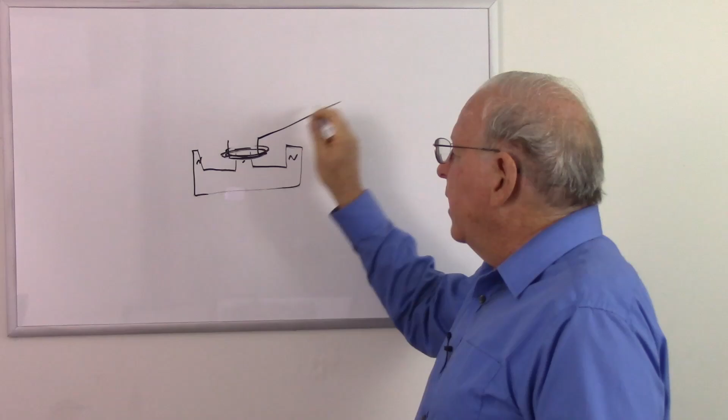A dynamic microphone is optimized to pick up sound and convert that into an oscillating current, and a speaker is optimized to take an oscillating current and convert that into motion.

So our speaker, let's take a look at the parts of it. As we said, there's a magnet. Usually that's a big ceramic magnet, and that's going to be mounted on some steel or soft iron. Soft iron meaning that it doesn't retain its magnetism when the magnet is pulled away. That's more permeable and carries magnetic fields a little better. And that soft iron is going to have that E shape that I'm talking about.

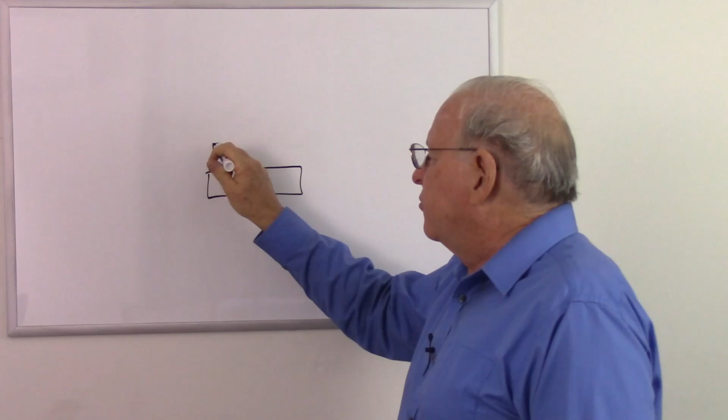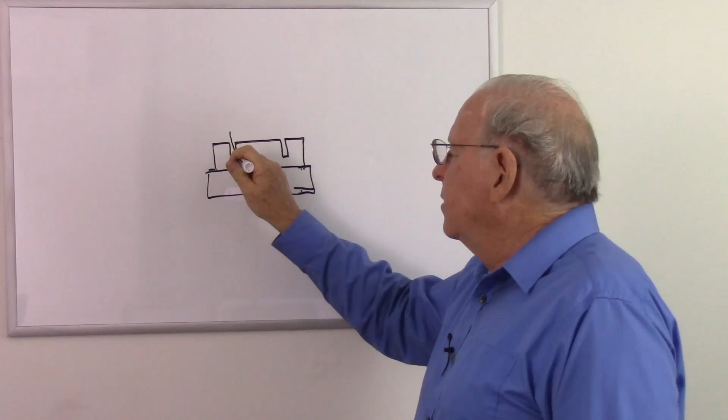And I'm going to draw this a little more realistically here, because the little channels in that E shape are very narrow, and inside there is a cylinder made of whatever material. It might be lacquered paper or it might be plastic, but that of course is wrapped with a coil, and that is free to move there.

And so as we run current to the wires coming out of that coil, we're going to get a current going in one direction as we put in alternating current. So here is our alternating current going in. Current goes one way, then it goes the other way, back and forth and back and forth.

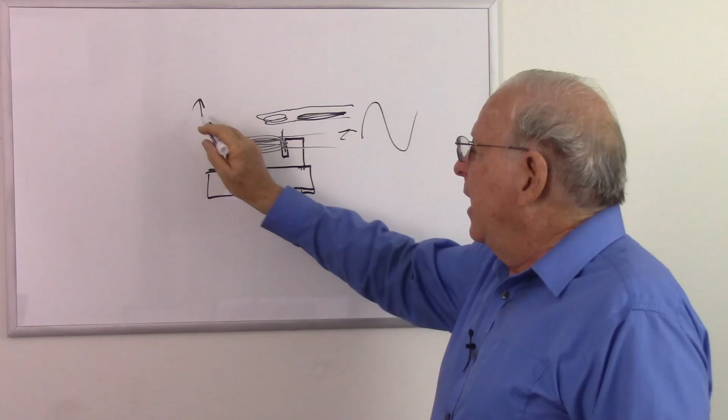As it goes in, we get a magnetic field which interacts with the magnet that the voice coil is suspended in, and that's going to cause that voice coil to want to go one way when the current is going one direction, and that voice coil is going to want to go the other way when the current is going in the opposite direction. So we will get an oscillation of that voice coil.

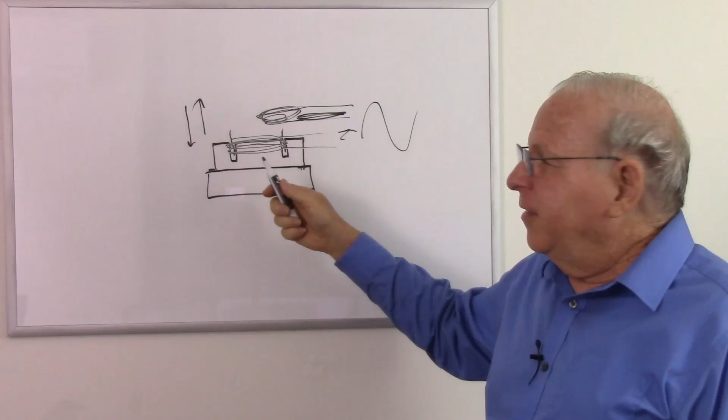Now, of course, there's a lot more to it, because if I simply had this, the first current that went in there would probably shoot the coil right out of there. But of course, there's other parts of the speaker that we need to make that work.

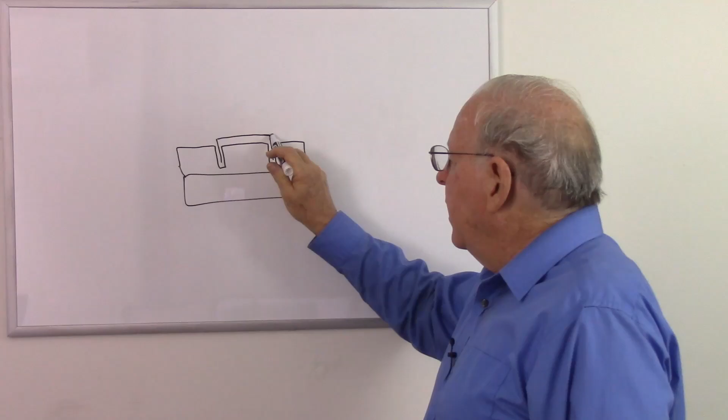So let's redraw that real quickly just to simplify that. So here is our magnet, or our pole piece connected to the magnet, and our voice coil is in there. I'm just going to draw it as two little lines there. That voice coil is connected to a cone of paper. Might be called the cone, might be called the diaphragm, but either way it's usually made of paper, a stiff paper. And also we have a frame around this, so this whole apparatus is mounted on a frame.

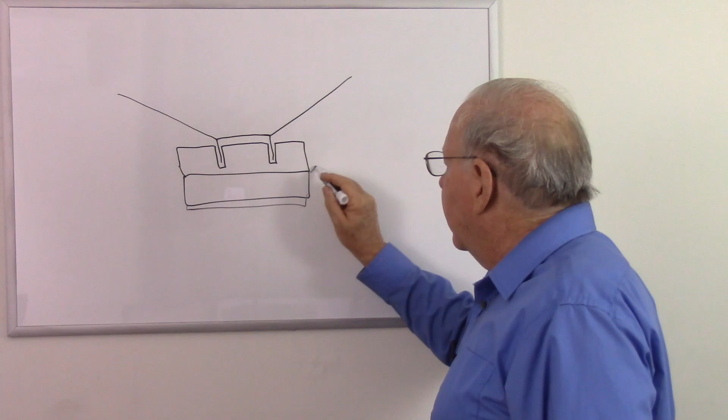Let's put that frame right here. This is usually a metal frame. And going to that metal frame, we have two supports. One is going to be in here, and that might go to some support at that point there. Notice I'm corrugating it because this particular support needs to be flexible, so it wants to hold that cone and that voice coil in the right orientation, but it needs to be able to move.

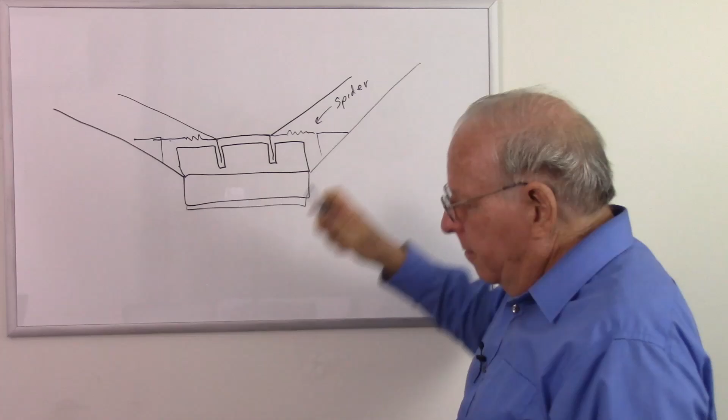This is called the spider. So that's going to hold the voice coil close to the magnet, but as we get further from the magnet, we have another support.

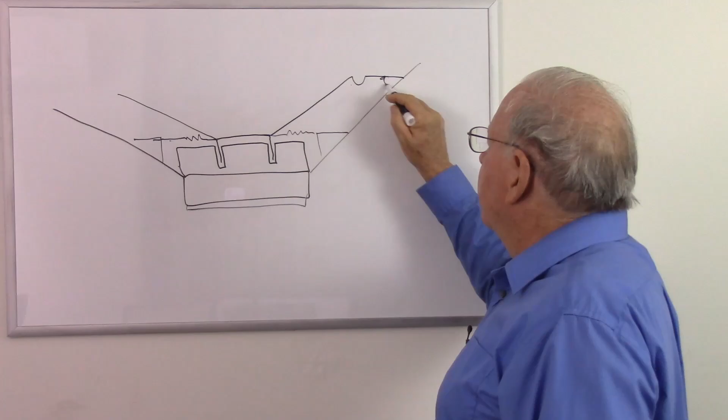I'll draw that as a little U shape here, connected to the frame. Once again, this might have a number of corrugations, trying to keep it symmetrical. This part is flexible, and that's flexible too. The cone is fairly inflexible. The spider is flexible. This is called the surround, or sometimes the roll, but usually called the surround, and it's simply a flexible support.

So now we have most of our speaker here. We have the flexible support at the edge of the diaphragm or cone. We have the voice coil, which is suspended by the spider. The diaphragm or cone goes between those, suspended inside the magnetic field.

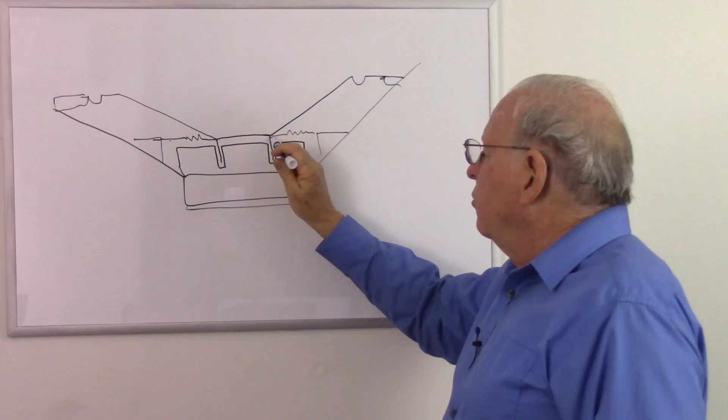This has a wire coiled around it. Those coils usually come out and connect to the cone, where there's a wire soldered to that. On the outside, I'll just draw this as a little line, but that goes to a metal connector that we can solder other wires to. There's actually two of those, but I'm just showing one. That's how we make the connection to the voice coil.

These are very flexible. This wire here is usually a braided wire, so I'll draw it like that - a braided wire that goes there, two of them of course, and that carries current to the voice coil. So that's the complete basic speaker.

What happens is if we put current to it, the current going one direction pushes the speaker out, and current going the other direction pulls the speaker in. With alternating current, it goes out and in at the frequency of the alternating current coming in.

We usually think of alternating current as 60 hertz or 50 hertz coming from the wall, the mains, or power grid, whatever you call it in your country. But alternating current can be any frequency, and the sounds we create when they go into a microphone create alternating currents from a human voice ranging from about 100 cycles per second to maybe 3,000 cycles per second. Our ears can hear from 20 cycles per second up to 20,000 cycles per second, or 20 hertz to 20 kilohertz.

So the speaker is going to be sensitive to a range of those frequencies. I'm drawing a big speaker here, which would be a woofer, sensitive to lower frequencies. A smaller speaker would be sensitive to higher frequencies. There might be some differences in the construction.

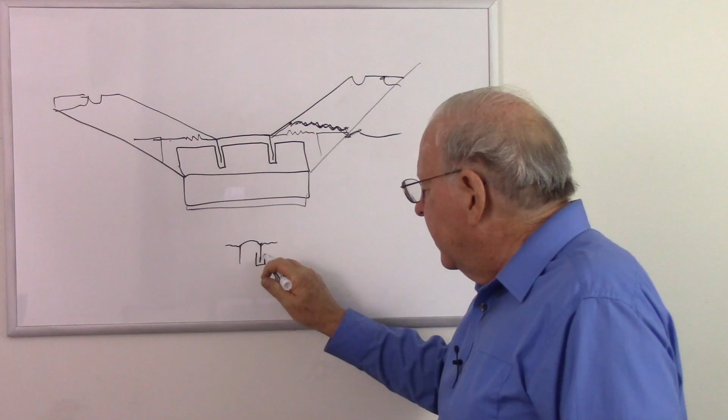For example, a speaker sensitive to high frequencies, called a tweeter, might have our voice coil, with a little dome on it and a spider. And of course here's our magnet. But notice what's missing is the cone - I'm taking that off again because your tweeter may or may not have a cone. It may have a small cone or no cone at all, depending on the design.

A tweeter needs to move very fast to respond to frequencies up to 20 kilohertz, whereas a woofer needs to be large and move a lot of air, but it doesn't need to be small because it doesn't need to move as quickly - lower frequencies won't be moving as fast as the tweeter.

A complete speaker system could have a woofer and a tweeter, and maybe even something in the middle called a mid-range speaker that handles the mid-frequencies. Now, some speakers try to handle a wider range.

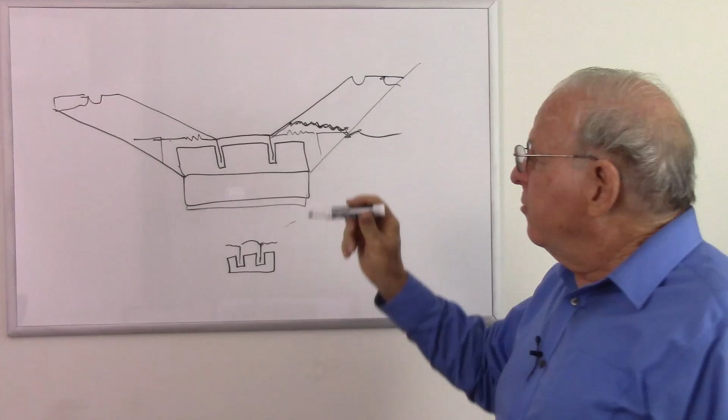One thing we can do is put a bit of a support right there and have an inner cone that's smaller, with some kind of flexible support in the right place. That is called a whizzer, and it reacts to high frequencies. So we have the main cone that reacts to low frequencies, and the whizzer, although it's moving with the main cone, can also react to the higher frequencies, broadening the range of the speaker.

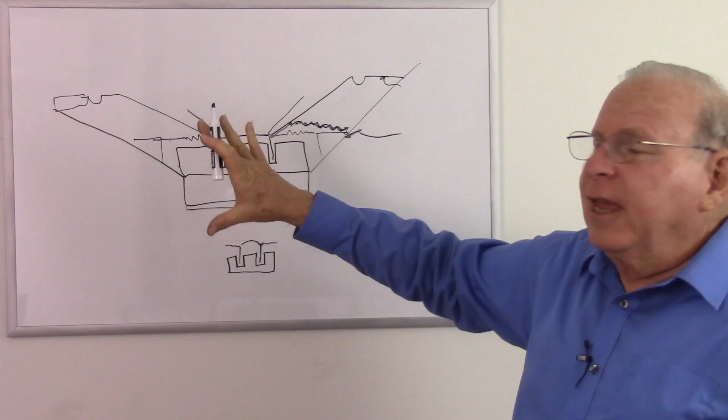You could have a full range speaker that responds to the entire range of human hearing, although it's not going to be as efficient as using multiple speakers, which I'll get into in more detail a little bit later.

So we added the whizzer cone to our diaphragm cone to the speaker to make it a wider range speaker, or maybe a full range speaker. And one other thing you'll find here that's kind of obvious but does have a name: it's usually curved like a dome, and that's called the dust cap. The speaker will certainly work without it since it has all the support, but you don't want dust getting in there. So there's a dust cap in the middle, and it does move some air, so it has some purpose.

And this tweeter, of course, seems to have a dust cap, but no main cone or main diaphragm such as the bigger speaker here.

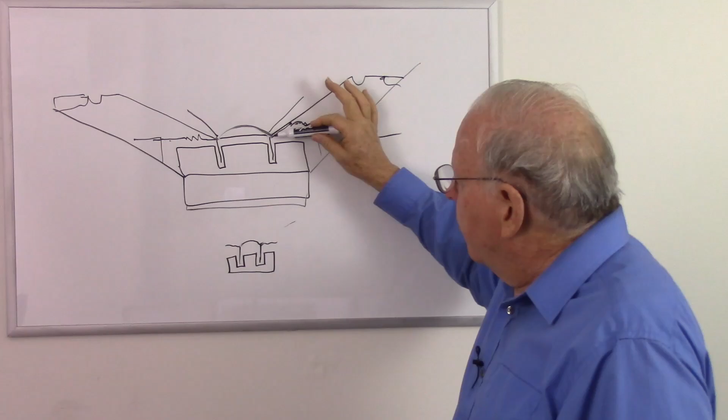So as far as the construction of a speaker, I've pretty much covered that. So there we have it: a magnet, a coil inside the magnetic field, and that's connected to a diaphragm, also called the cone. The spider supports the cone near the magnet. The surround supports the cone near the edge. Those need to be flexible so the cone can move freely. We have a dust cap in the middle. We may have a whizzer cone, but that just depends on the design if they want to try to increase the range of that speaker.

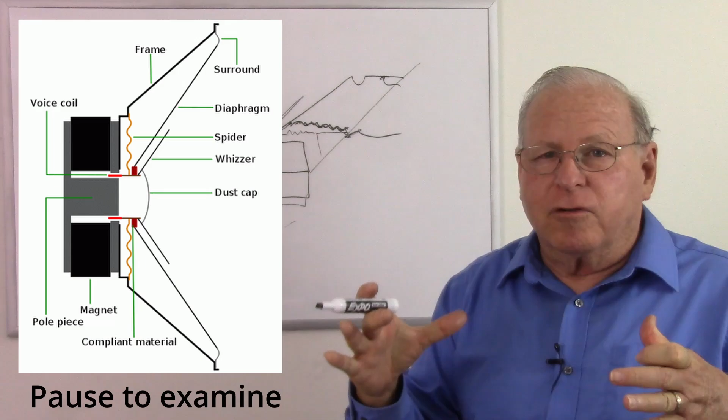And then, of course, a mid-range speaker would be smaller and made to respond to mid-range frequencies, and then the tweeter. This is called a woofer, the big speaker. A speaker that responds to some higher frequencies, but not all the way up to the highest frequencies, would be a mid-range speaker. And then the one that responds to the highest range frequencies is going to be a tweeter.

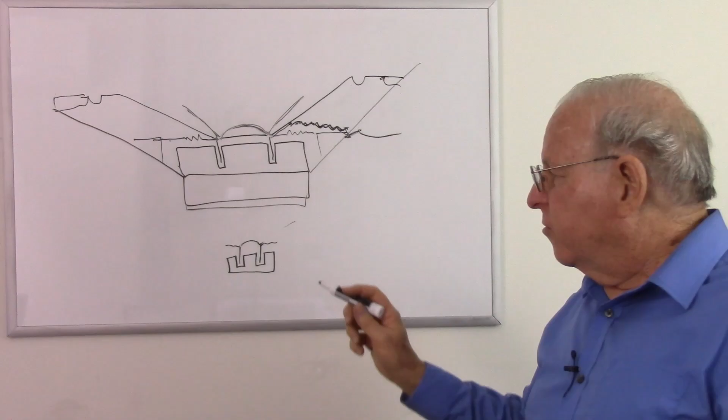And there can be some other designs for a tweeter. We'll talk about those in a moment.

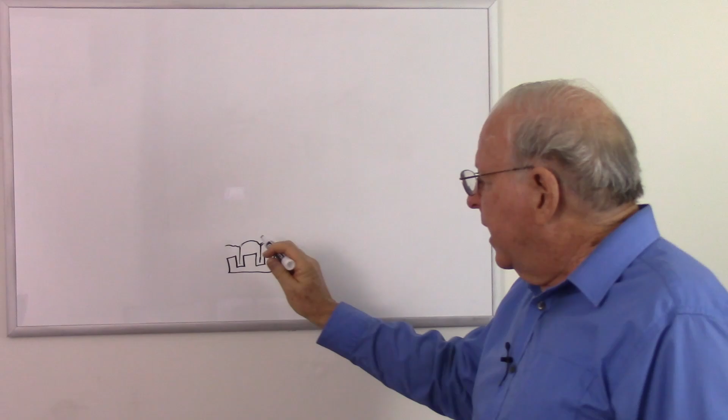Now, another type of speaker that's fairly common is a horn speaker. We can probably make one of those by getting rid of our big woofer here and just going to our little tweeter, because a horn speaker is going to have a driver, which is the part of the speaker that moves. So we don't talk about a driver in woofers and tweeters and mid-ranges unless they are a horn speaker. We may call it a driver, and the part that is the driver is pretty much a regular dynamic speaker. But this is connected to a horn which flares out.

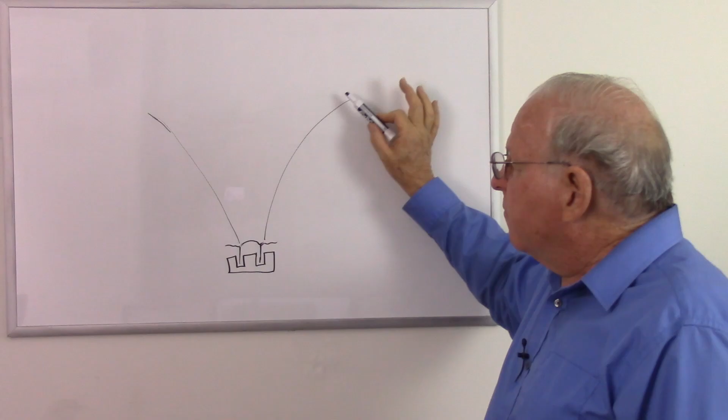And the purpose of that is that this horn couples the speaker to the air very efficiently. It's an impedance match, actually, like I'll be talking about in a moment - it's matching the speaker impedance to the air impedance. So it's a very efficient way to get the movement of this driver coupled to the air. Instead of having the big cone to couple, we have this horn that couples it to the air, and they can be big and they can be small.

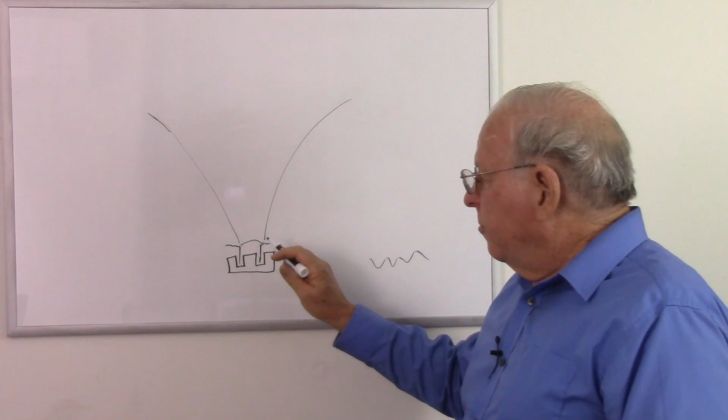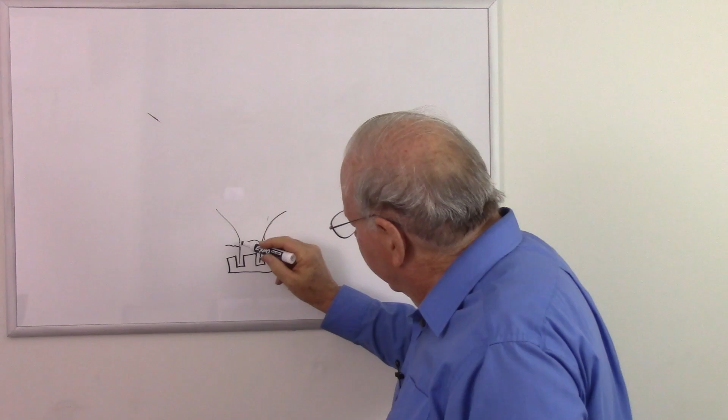They can work with lower frequencies or high frequencies, and a lot of tweeters might actually be horn tweeters. They would be, of course, a lot smaller, made to react to higher frequencies. I'll just draw that like that. So that's not connected directly to the speakers, but it's acoustically coupled, and it takes that sound and couples it very efficiently to the air.

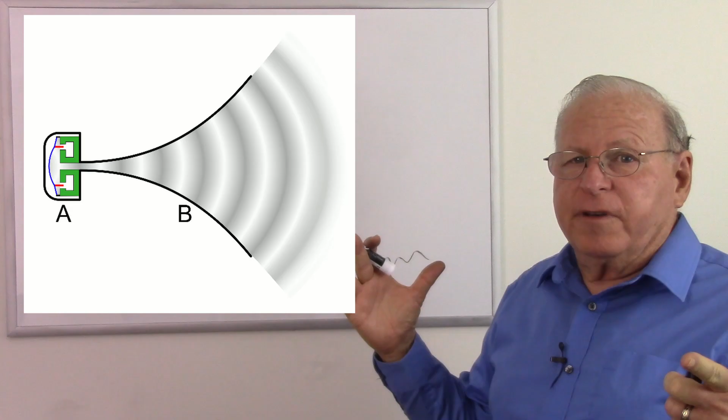So horn speakers are quite common. You go to a music venue or other kind of place where there's big speakers - horn speakers are ubiquitous because of their great efficiency that can get a lot of power into a lot of air.

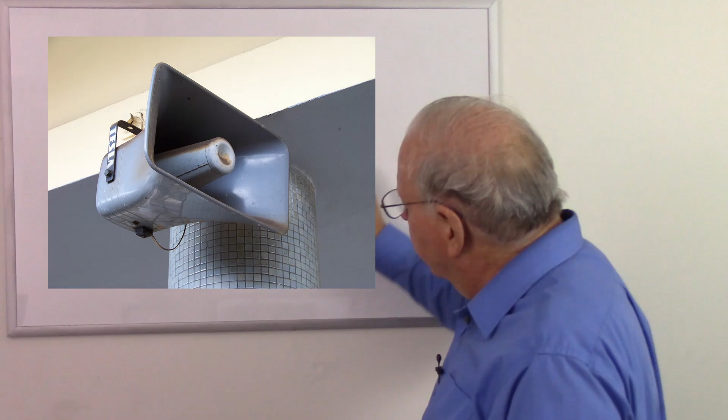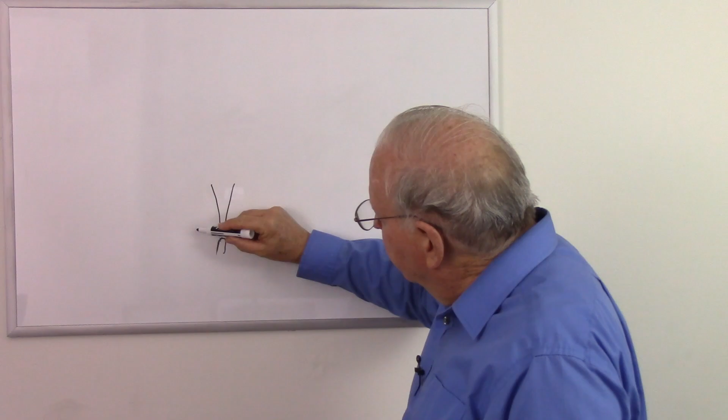Another type of horn speaker you might see is a folded horn - that's the megaphone. One common way to see that is with a handheld megaphone. Here's a picture of one here. And sometimes they're not handheld - there's one there. The way that is made is it's basically just another horn speaker, but I'm going to draw the profile of that here. So remember, this is the coil and driver, and we have the horn acoustically coupled to that. We go out just a little bit there, and then there's another horn capped over that. Let's see if I can draw that here.

And then on the outside of that is an even bigger horn. Okay, let's see how well I can do this. How's that look? Not too bad.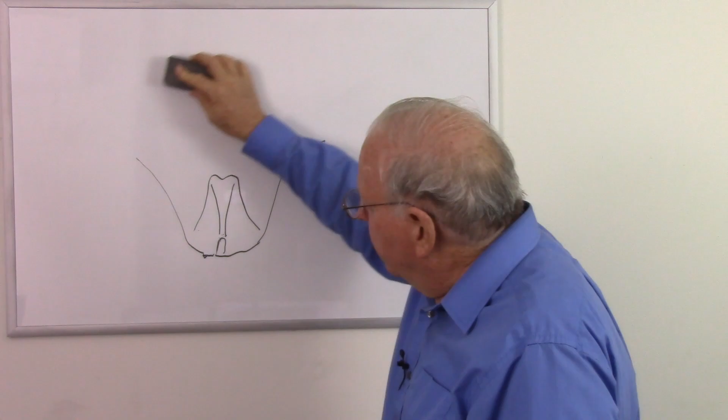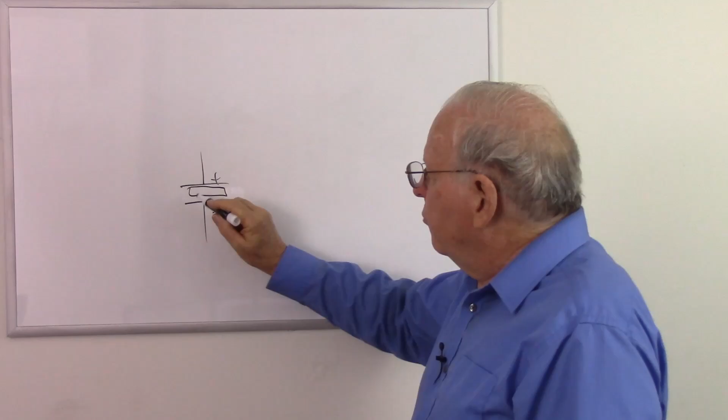One other speaker to talk about, besides the dynamic speaker, that's fairly common is a piezoelectric speaker. Remember, the piezoelectric effect is where if we distort a crystal, it's going to create a voltage, or vice versa. If we put voltage across a crystal, it's going to distort. So here's the basic diagram of that. There's a crystal between two holders. We put a voltage across there. It's going to distort that crystal, or if we distort the crystal, it's going to create a voltage.

So a piezoelectric element can act as a microphone or a speaker. Are there piezoelectric microphones? I don't know how common they are, but there are common piezoelectric speakers that are reasonably often used as a microphone. For example, if you buy an electronics kit that allows you to make all kinds of different circuits, you may find that it comes with a piezoelectric earphone, and if you make a circuit that needs a microphone, it might have you use that earphone as a microphone. Some of the Radio Shack kits came with a piezoelectric earphone that was also used as a microphone occasionally.

But we're going to use this as a speaker, and usually it's used for such as earphones or headphones. How often are they used for a big speaker? Not very often, but if they are, they would be used for tweeters because they work only at high frequencies. But that's worth mentioning because that is a type of speaker that you will see occasionally. I think they're sometimes used on the motherboards of computers, but don't quote me on that.

So that's your basic types of speakers, your dynamic speakers, and there's not much more to say about that. There is quite a science into building them, but that's not what this is about. We're just talking about the basics here. So let's move on to the next thing, and that is speaker enclosures, because to get the most out of your speaker, you have to have it in a proper enclosure.

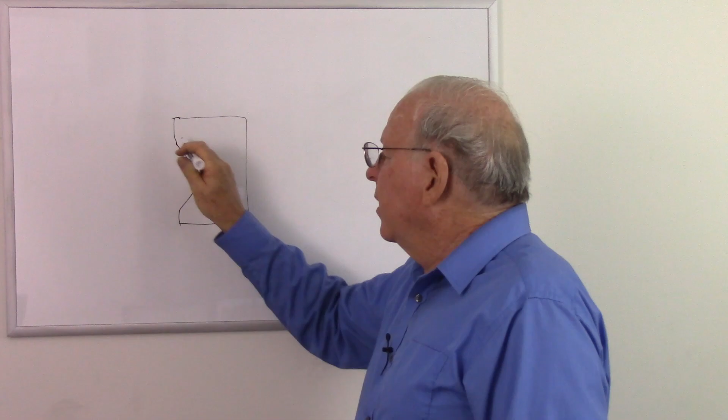So let's talk about the first type, and that would be a simple sealed enclosure. So we have a box and a speaker. And wires would come out, everything would be sealed, and the idea is that we don't want any air going into or out of this box. And the speaker may be designed for that. In fact, it's a type of speaker called acoustic suspension, which is specifically designed to work in a sealed box.

You do want to have the box the right size because the sealing of the box limits the movement of the speaker because, of course, as the speaker moves in, it's going to compress the air, and the air is going to resist that, so it's going to resist the movement. And when it moves out, it's going to rarefy the air, and the air is going to resist that also. So it restricts the movement of the speaker, which is negative feedback.

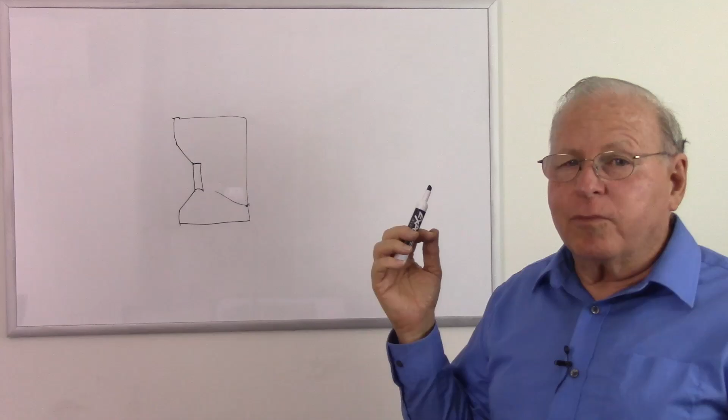And when we talked about that in circuits, what does negative feedback do? Well, one thing it does is it broadens the frequency range, the bandwidth of the circuit. So a speaker that has a response like this—here's our graph, here's 20 hertz and 20 kilohertz—a speaker may have a response that looks something like this. And if it's an acoustic suspension speaker in a proper box, it's going to essentially pull down that response in the middle and flatten it out. As you can see, that is therefore widening the frequency response. So it's pretty much flat from there to there, where before it was flat from maybe there to there.

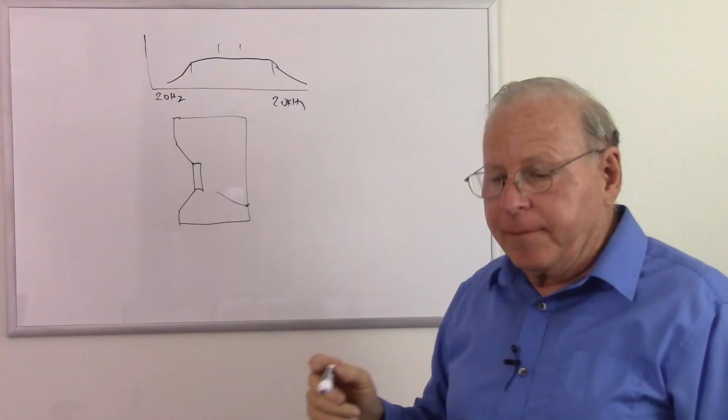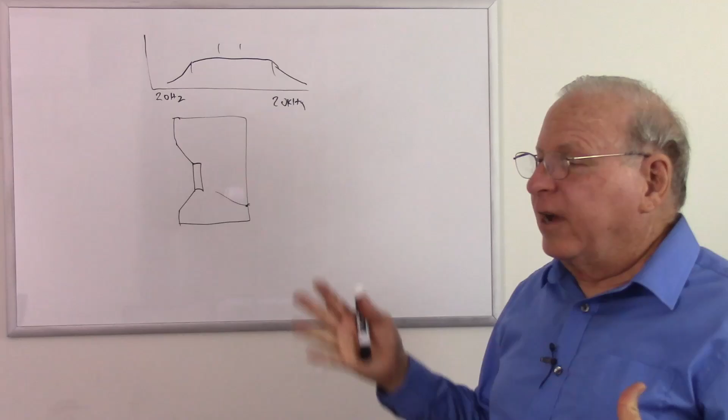So that's your acoustic suspension speaker. How common are they now? I don't know, I haven't bought speakers in a while, but the last time I bought a set of speakers and built them myself, I used acoustic suspension speakers.

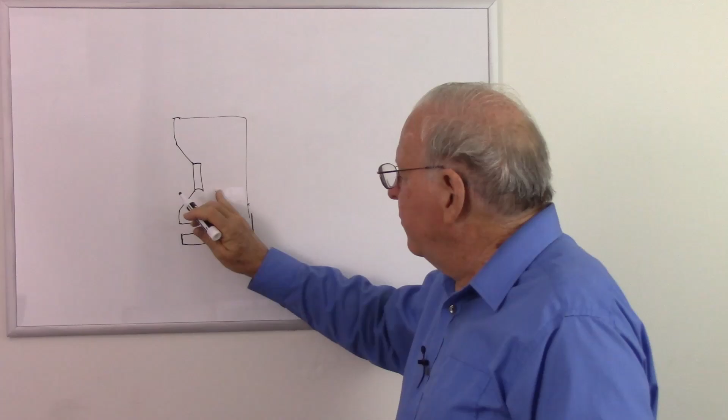Next type of speaker enclosure is probably the most common. You'll very often see these in your subwoofers if you have a system that has a subwoofer, and that is a bass reflex. I'm just going to modify this box here to become a bass reflex. So there's our speaker with its accompanying wires, and there's a tube.

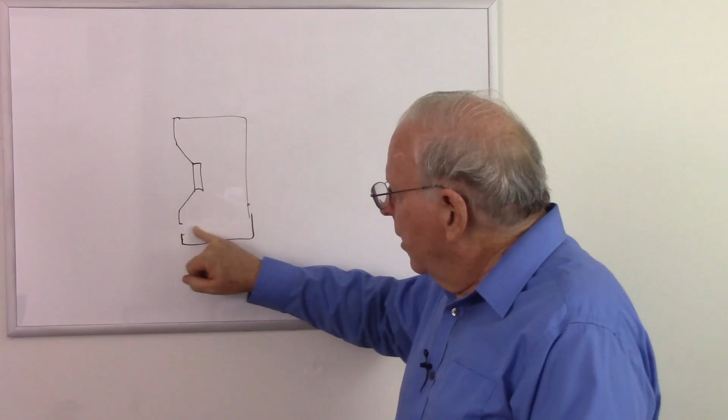So what's that for? Well, as I said with the acoustic suspension speaker, the speaker is going to lose some efficiency, trading that off for bandwidth. If we put a hole in here, that's going to do two things. One, it's going to allow that speaker to move more freely, so it's going to be more efficient. But one problem with that is that sound coming off the speaker is going to be out of phase.

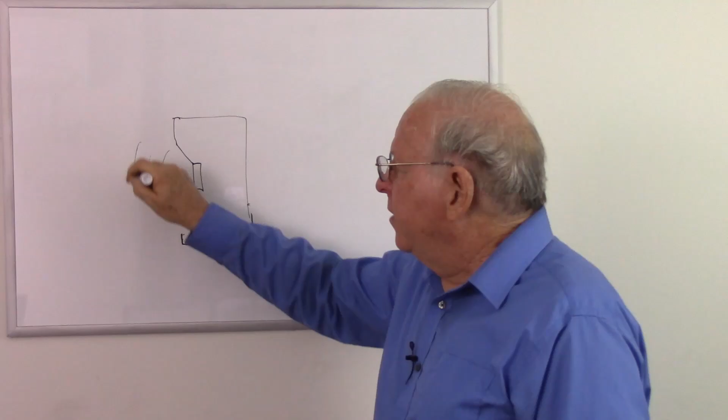When the speaker cone is moving this way, it's going to be sucking air in, and when it's moving this way, it's pushing air out. So when the speaker is making a wave that goes this way, we have a wave coming out of the cone that is the opposite polarity. So if we have a sound peak...

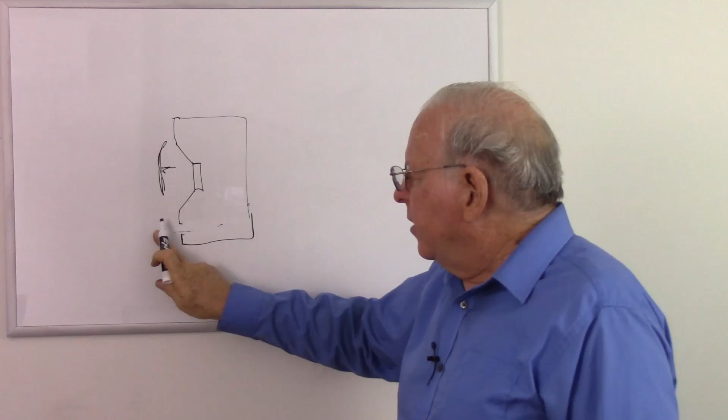Let's say the speaker is moving that way, creating a compression wave right here. At that point, there's going to be a rarefication wave produced here. They're going the same direction at the same speed, and they tend to cancel each other out. However, if we put a tube there with the right design, we have to have the tube and the cabinet designed the right way.

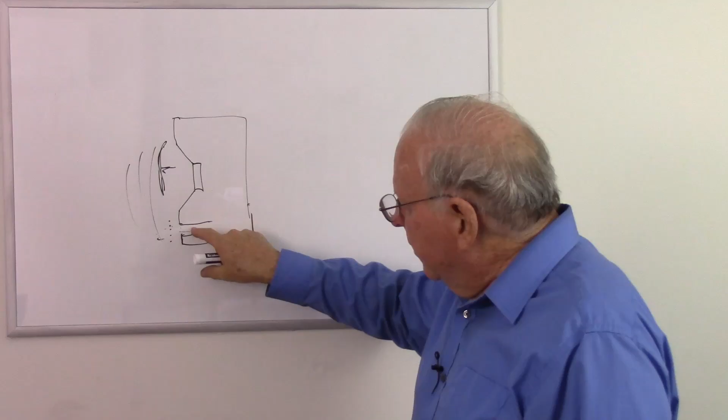Back when this was invented, it took a lot of trial and error to get this right. Now we can use computers to design them, but you had to get it just right: the volume of the cabinet, the length of the tube, and the diameter of the tube. And the tube and the cabinet together would resonate at frequencies above and below the range of human hearing, so you wouldn't get any peaking from resonance, but yet at the same time it's going to invert the wave coming out.

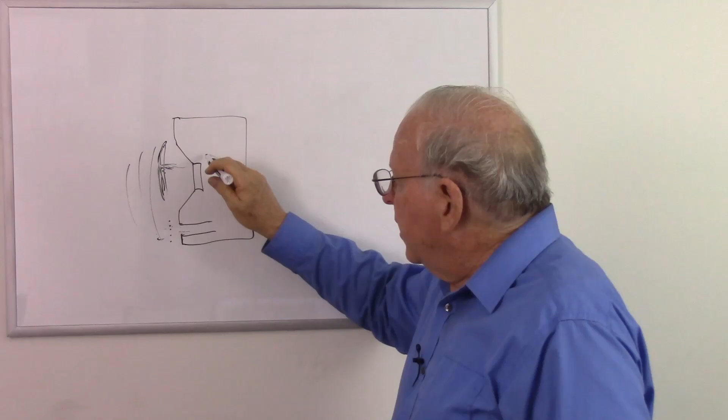So now when the speaker is moving this way and creating a pressure wave, it's also creating a rarefication inside here, but by the time it gets out here, because of the resonance of the system, it's also going to be a pressure wave. That increases the efficiency, and if you do it right, you can also broaden the bandwidth. So that's your bass reflex box, very common. If you look at a subwoofer, very likely you'll see a little tube in there, which is the reflex tube of a bass reflex speaker enclosure.

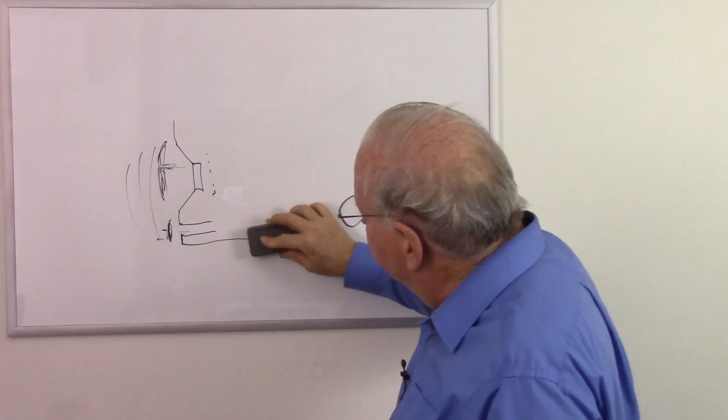Now, another type of enclosure that's actually not that common is a passive radiator. In fact, I don't really know how common they are, but I've looked at a lot of Bluetooth speakers that use this idea. So what we have here is another speaker cone in the same box. So here's a speaker and a speaker cone.

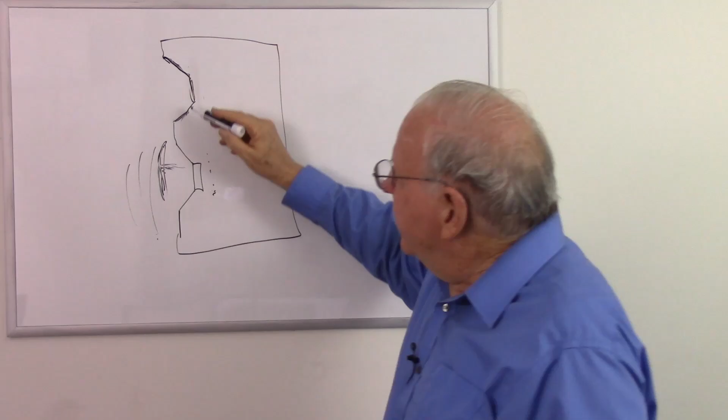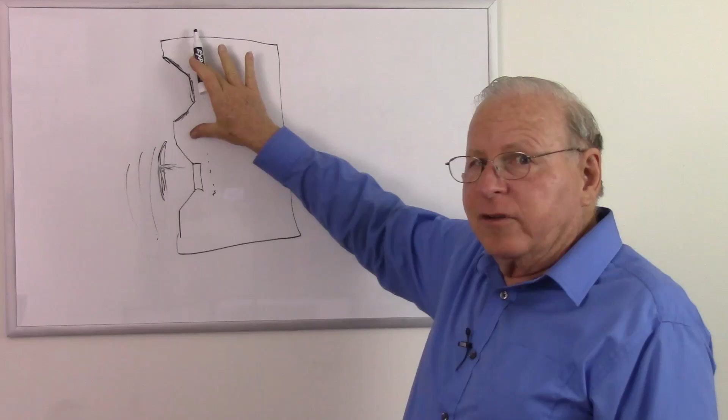They should be pretty much the same, so let's make them look about the same. Anyway, this is basically a speaker with no voice coil - here's our voice coil and our magnets on the real one, and there's just a speaker cone on this one. If we get the resonance of the box just right and the resonance of this speaker cone just right - once again, it was a lot of trial and error when this was invented, but now it can be computer designed - we get this speaker coming out, producing a pressure wave.

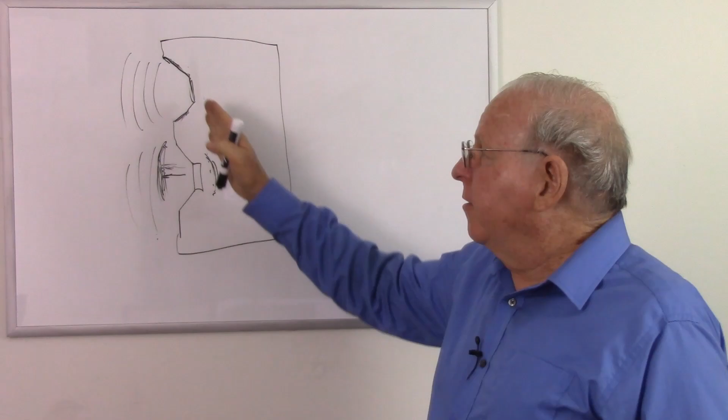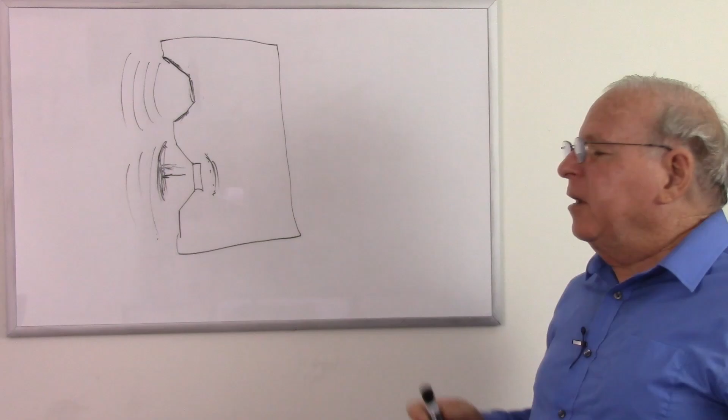There are some other types of speaker enclosures, but we're not going to go into those in detail because that's a specialty on its own. So let's move on and talk about typical speaker systems.

You may have speakers that are full range speakers, but that's pretty difficult to make. So most systems will use multiple speakers: one speaker that handles the bass, called the woofer, another speaker that handles the high frequencies, the tweeter, and maybe one that handles frequencies in between, called the mid-range. It's not at all uncommon these days to have a subwoofer, something to handle the really low frequencies that can actually go below the frequency of human hearing, so you more feel it than can really hear it. Let's take a look at how that is done, because we have to route those sounds to the right speaker.

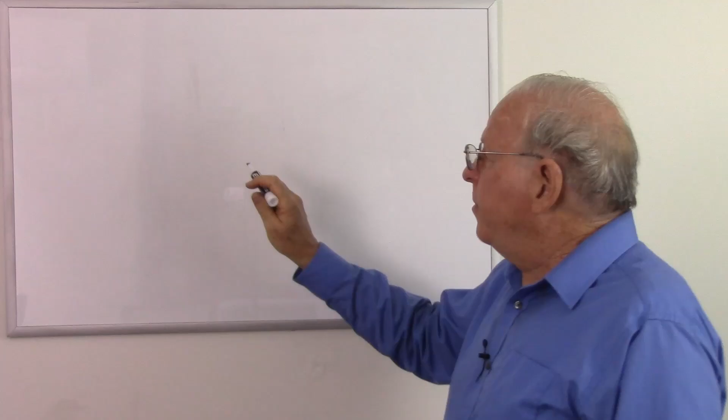So what we have are two wires heading to our speaker, and those are carrying your full range of sounds, all the way from 20 hertz to 20 kilohertz.

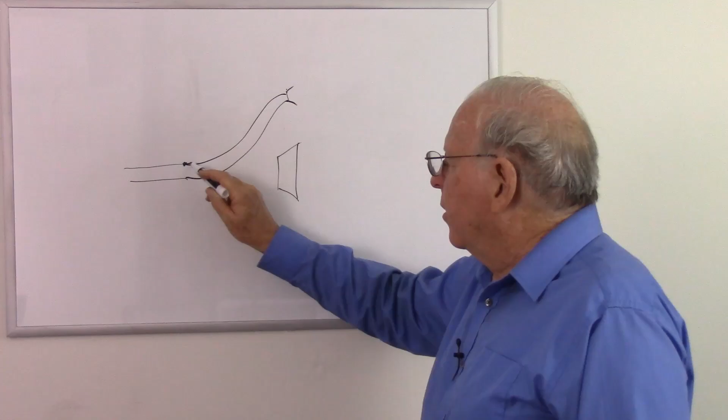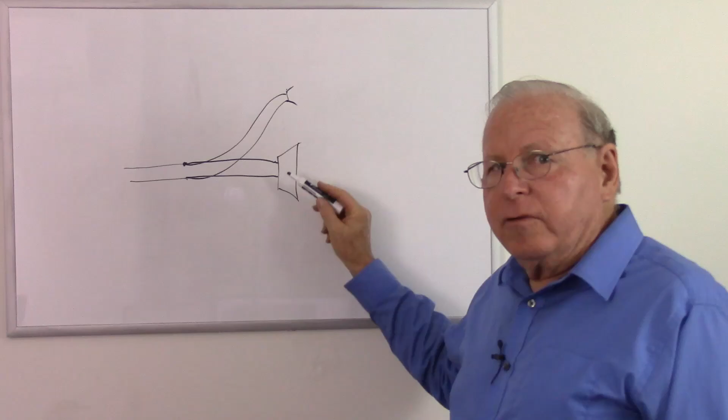We have a speaker here, a woofer and a tweeter. We could run the speaker wires to the tweeter and split off to the woofer, but what's that going to do? The woofer is not going to react well to high frequencies, it can't move fast enough, so high frequencies going into it are just wasted as heat in the voice coil. Same thing happens here: the tweeter can't handle low frequencies, and those are wasted as heat too.

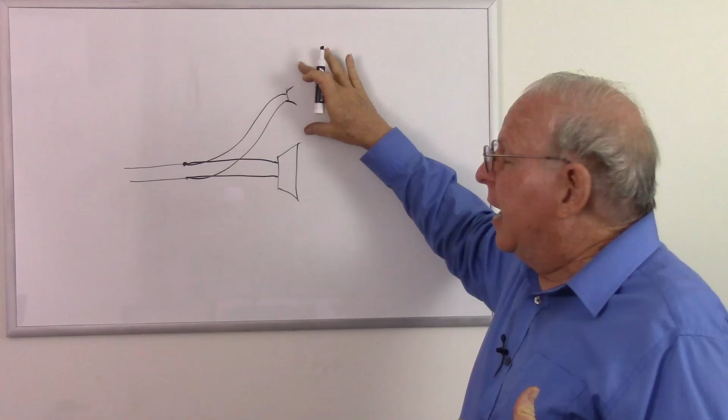So what we want to do is steer high frequencies to the tweeter and low frequencies to the woofer. Sometimes the most important thing is just avoiding low frequencies to the tweeter, because that's where the biggest problem tends to be. The woofer isn't so bad when it gets high frequencies, it doesn't produce as much heat as the tweeter might. In fact, the tweeter could possibly be damaged if we put enough low frequency energy into it.

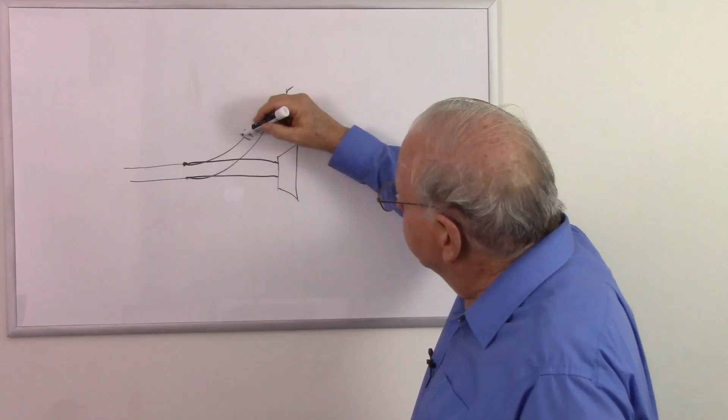So what we will do is simply put a capacitor in series with the tweeter. It's called, of course, a crossover capacitor. We need a non-polarized capacitor, but usually this needs to be a big capacitor. So what do we do? We need a large value capacitor in a small package, but it can't be polarized like an electrolytic capacitor. So what do we do? Well, we take two electrolytic capacitors.

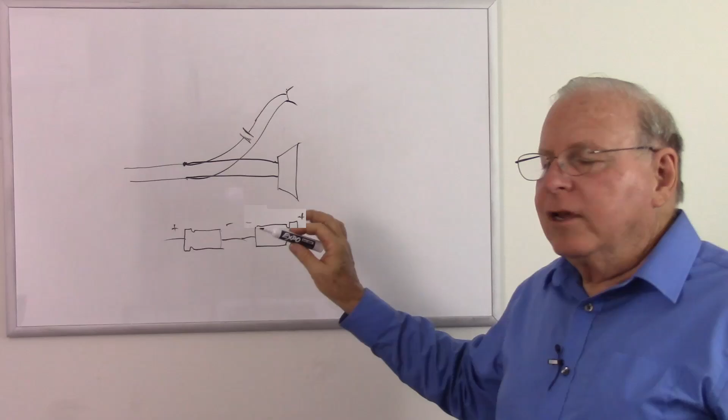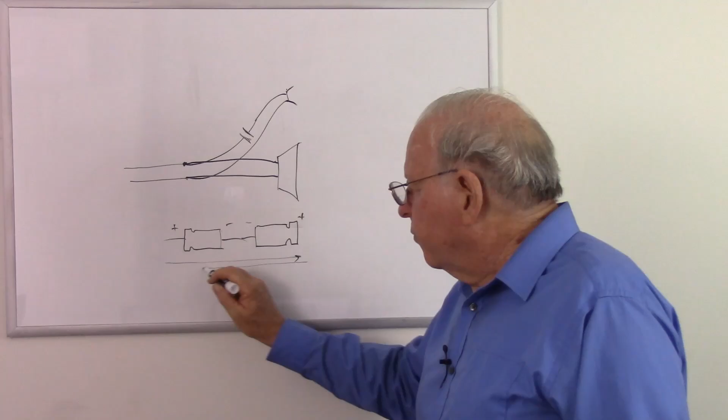So there's one with axial leads, a positive side and a negative side, and we'll hook another one like this. These are designed so that they can withstand reverse polarity. So when the polarity is correct, for example when the current is going this way, this capacitor has the correct polarity, so it acts like a capacitor, and this one basically becomes a short circuit. If it's designed to handle that, then this will work. And when the current's going the other way, we get the reverse: this one acts like a capacitor, and that one becomes a short circuit.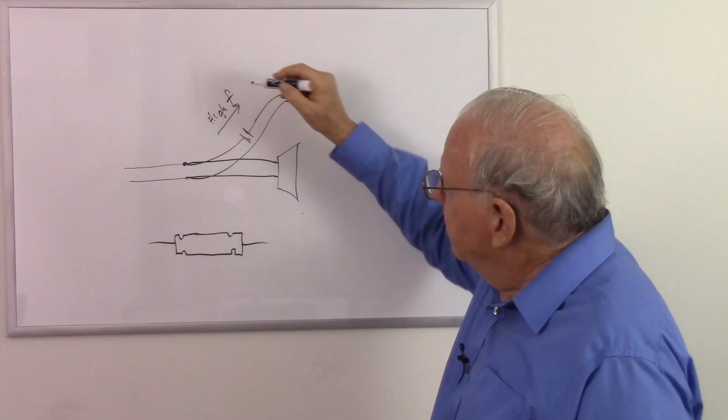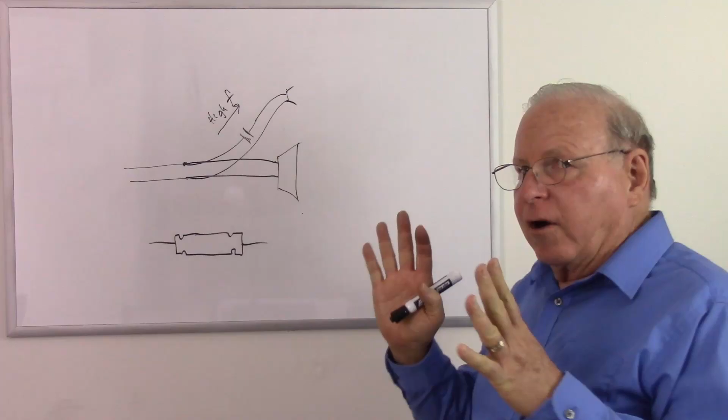And we know what capacitors do: high frequencies like to go through capacitors, but low frequencies don't. So that basically blocks the low frequencies from the tweeter. But to get a little more sophisticated, what we need is a crossover network, which is a series of capacitors and coils that are high power filters that can handle the power going through them, directing the energy to the correct speaker. So we will have a crossover network that can get fairly complicated.

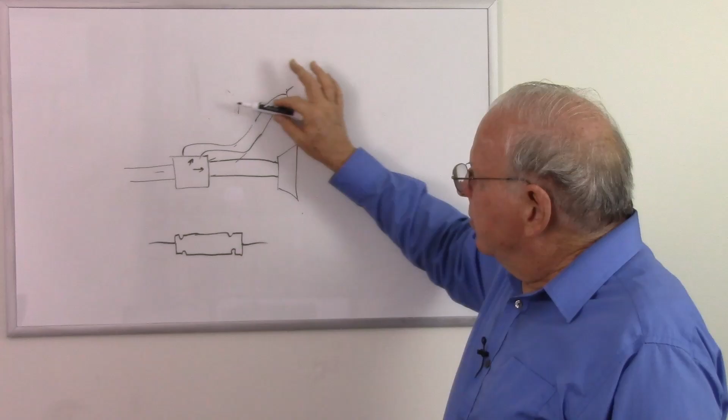So there's a signal coming in. We get the high frequencies to the tweeter, the low frequencies to the woofer, and if we have a mid-range, we have a special crossover that handles all three speakers. So that's what you would probably have inside a small speaker enclosure: a small woofer, a small tweeter, and a crossover network to direct the energy to the right speaker.

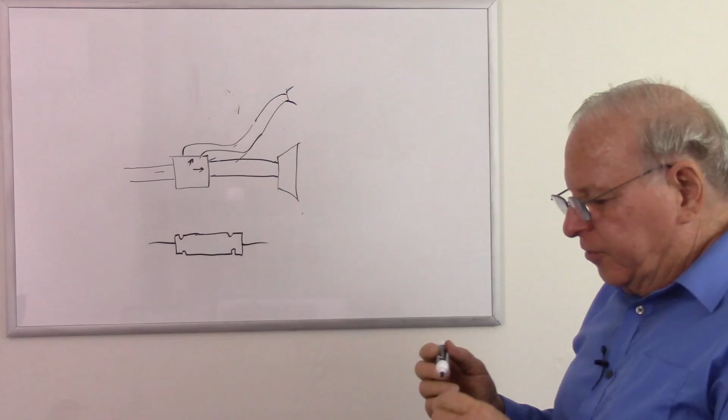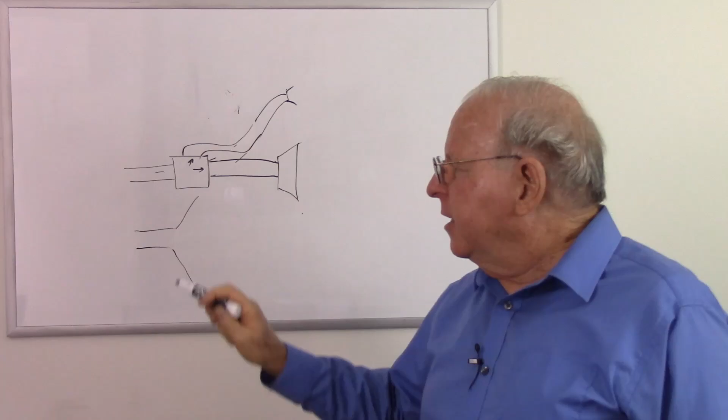Now a lot of systems now have subwoofers, so what do we do there? Well, the subwoofer is a different entity, so we're probably going to have a separate wire just to send to the subwoofer. And what's that going to be? It's just going to be an even bigger speaker, not too much to say about that, very commonly in a bass reflex enclosure. So there's our subwoofer in its box.

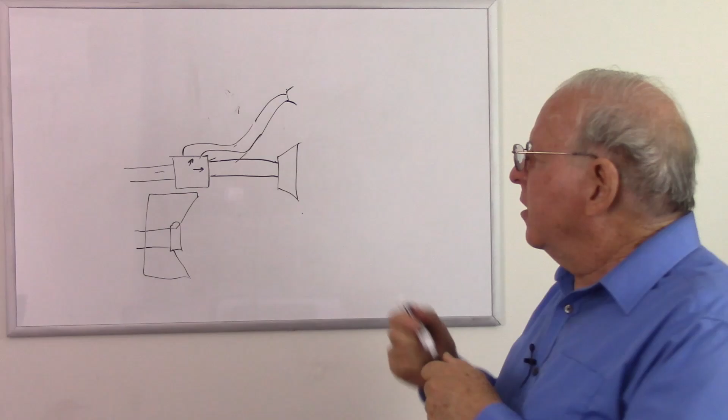The interesting thing about the subwoofer is at low frequencies, you can't really tell where the sound is coming from. With high frequencies at your tweeter, you can hear where the sounds are coming from. But the subwoofer, or even some sounds from your woofer, you can't tell where they're coming from. So your brain processes sounds, and if it hears a high frequency sound from a tweeter along with an associated low frequency sound, it says that low frequency sound is coming from that tweeter. So it's very common to get speaker systems with little tiny box speakers that you put on your bookshelves, and then you have a subwoofer somewhere else. These handle your higher frequencies, and the subwoofer handles your lower frequencies.

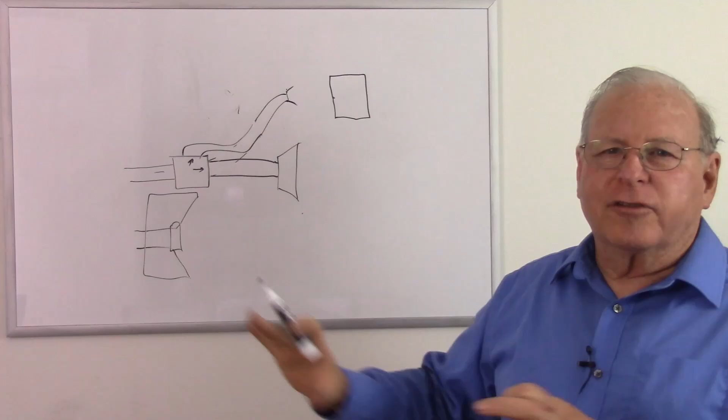Bose makes some systems that are very commonly made this way. I have a number of computer speaker systems that are made this way too: small speakers and then a subwoofer, and they sound surprisingly good for computer speakers.

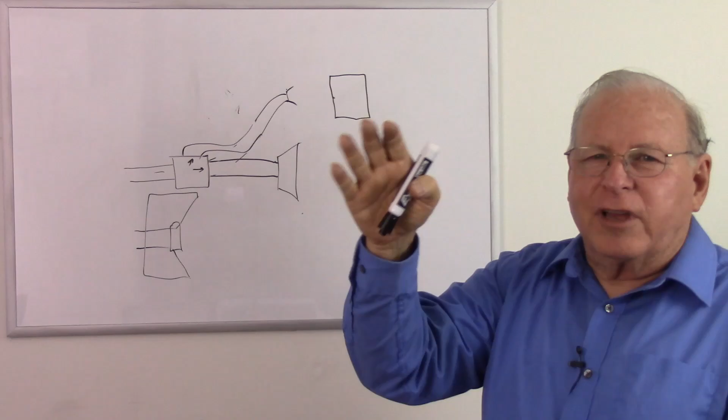But even in your good high-end stereo equipment, especially like Bose, you'll find systems that have just two little speakers to put on your bookshelves, and those handle the high frequencies. When you hear the high frequencies, you say, yep, that sound's coming from somewhere between those speakers. The subwoofer is making sound, and if that sound is coming from there and the subwoofer sound seems to be associated with it, you'll think you hear the subwoofer sound coming from there too. So your subwoofer can be put almost anywhere in the room, and it's big, so you might want to hide it somewhere and put it wherever you want to.

Some are made to fire horizontally like a normal speaker, but some are made to actually fire downward. That has to be engineered in its own right because there are complications of having that air pressure underneath it, but that is engineered into it so that your subwoofer can handle that.

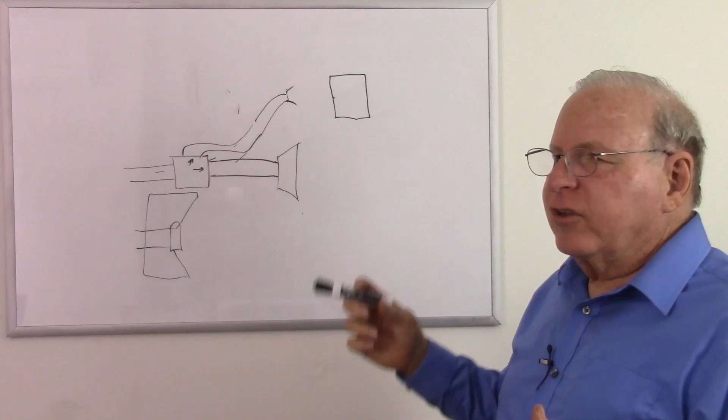So if you have a system with a subwoofer, where do you put that subwoofer? Anywhere you want to, because you really can't tell where that sound is coming from. But you may have a system with multiple speakers in the boxes, and that's the same thing.

You put them where you want to have the sound balanced, where you have your right speaker and your left speaker. Of course, I'm backwards to you, but you put your speakers where you want the sounds to be in between those speakers, and then your subwoofer somewhere else.

And of course, you may have a system that has surround sound. The most common surround sound system is what's called a 5.1 system. What that means is that we have 5 speakers: 2 main speakers, just like your normal speakers, in the front. You would also have 2 speakers in the back so that you can have sound anywhere in between those speakers.

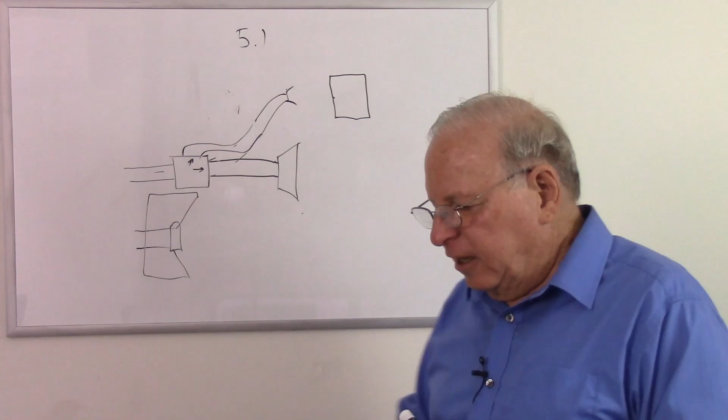But if you're watching this on television, you want the dialogue and a lot of the sound effects that you are watching to appear to come from the TV screen. So here's our TV, and here's our speakers.

Wouldn't I like to put my speakers on the wall like that? I have to have mine hidden in a cabinet, but that's the way it goes. I don't have the authority to put big speakers on the wall, so I have them down a little lower. But anyway, the ideal place would be on the sides of your TV.

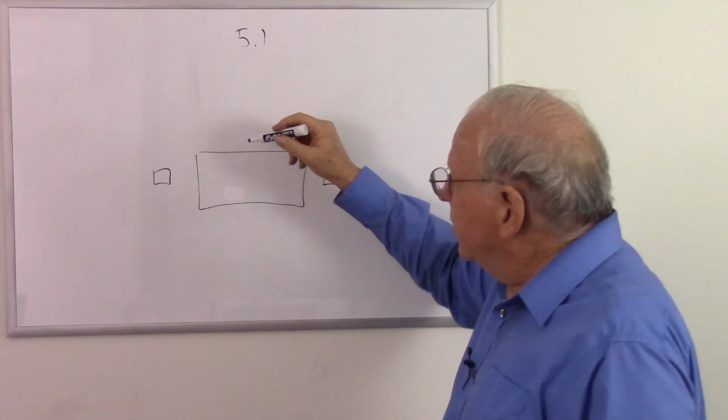Some TVs actually have built-in speakers, but sometimes the sounds of dialogue are hard to locate. So what they'll do is put another speaker up here, your center channel speaker, very very common, that would go on top of or below your TV to bring sounds such as dialogue into the center.

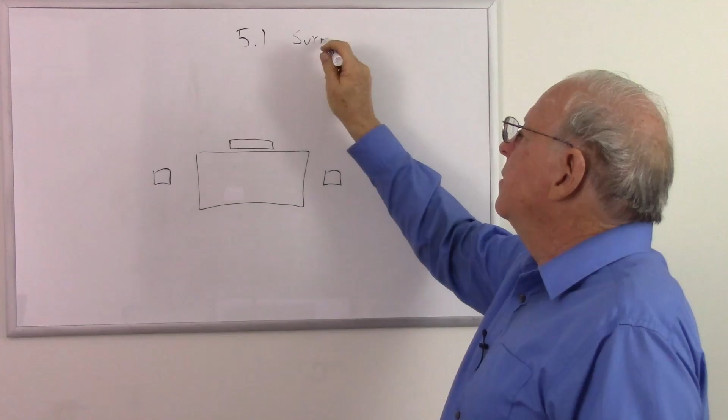And then you have your rear speakers in the back. And then what else do you have? Well, that's 5 speakers: 2 front, 2 back, 1 center speaker. That point 1 is your subwoofer. So 5.1 surround is going to have 4 main speakers, a center channel, and a subwoofer.

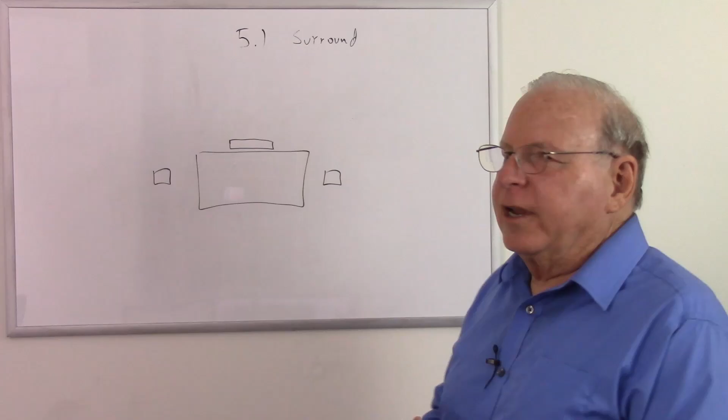There's also, I think, 6.1 and 7.1 systems. The most common, of course, is 5.1, but they do have systems with even more channels. I'm not sure how much that's needed. And of course, you have to have what you're listening to be in that same format. So 5.1 is the most common, and a lot of DVDs and Blu-rays come these days with 5.1 Dolby surround sound encoded onto the disc.